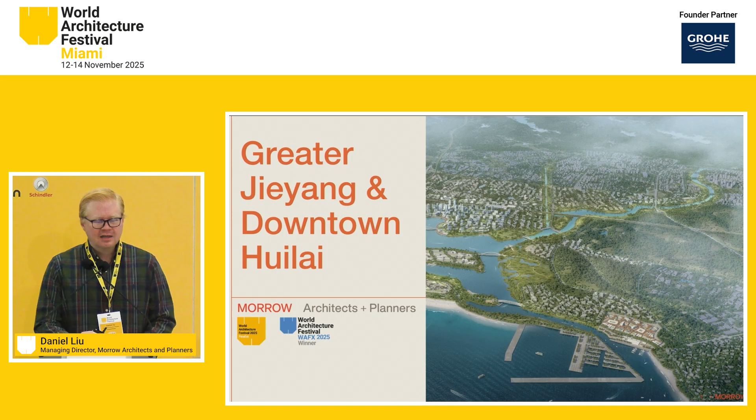Since this session is about smart cities, we wanted to spend a bit of time to share within our own firm how we look at cities, how we define cities, and how that applies to better city development.

For us at Morrow, the foundation for how we define a city generally starts with the population. Today here we are in South Beach, or Miami Beach, which is a city of only 80,000 people. So legislatively, it has all the rights of a city. But from a planning perspective, it doesn't make sense to have such a big auditorium or such a big convention center that could fit 15,000 people in a city of only 80,000 people.

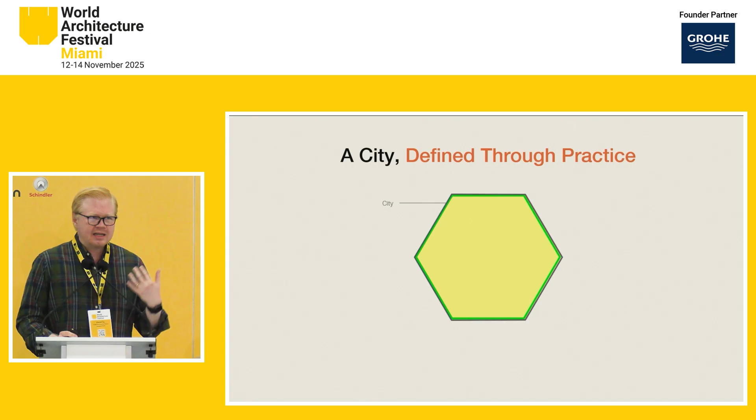So definitely from a planning perspective, there is some kind of understanding of the relationship between this city and Miami and all of that. This hexagonal model that is popping up on your screen now, this is the North Star within our own firm of how we anchor city development. And we start with a population.

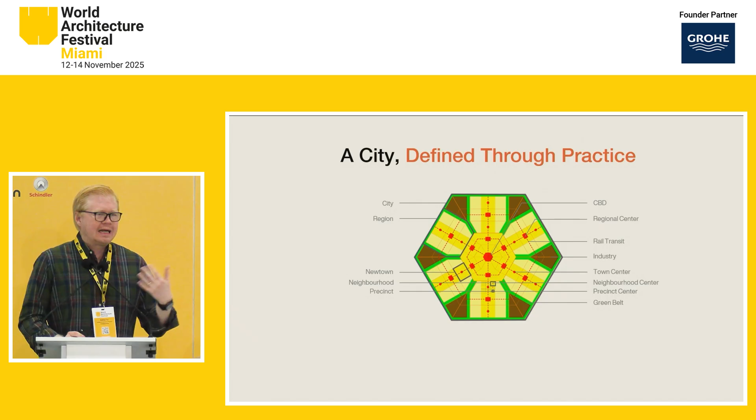For us, cities generally have a population of between 2 to 5 million people. Within that, we anchor the land use and the different amenities that are required to enhance livability, to enhance economic progress, et cetera.

But beyond that, I think what's really important is that within that model itself, there is a very structured hierarchy of different, what we call urban cells. And within each urban cell, there are different strategies for implementation.

For example, in a smaller area that's maybe just a planned population of 50 to 100,000 people, the strategy that we would implement there would have to be fit for purpose, but also the hierarchy of that city or region in relation to the rest of the urban area would be really important to maintain.

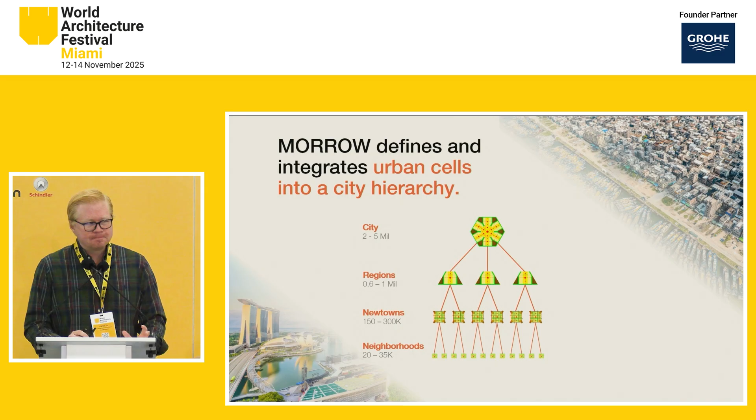Now, when cities are bigger than 5 million people, we have an approach for that as well, and we refer to that as constellation cities. This approach allows us to maintain that hierarchy of different nodes or different urban cells within a city that can also be applied at a much larger scale.

This project that we did in Jieyang actually has 4 sub-cities. And Jieyang itself is quite huge, about 5,000 square kilometers. So it's, for us, a constellation city.

Now, just to give some background, at Morrow we're only about 8 years old, and we've done master planning in about 20 cities and have implemented this approach in all of them. But our founder and the founding team have actually been distilling and updating this urban planning approach over the last 30 to 40 years.

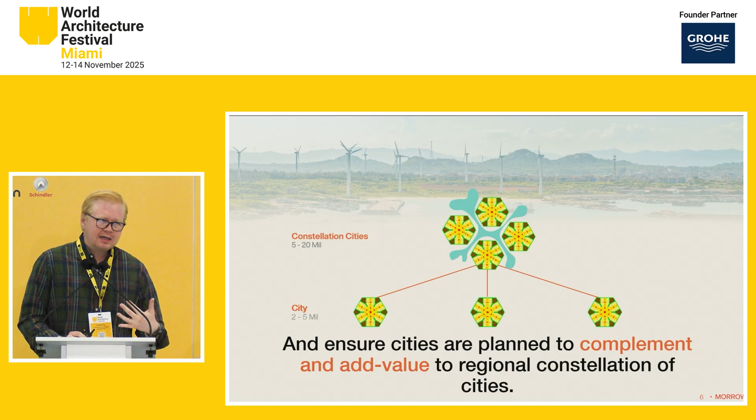And it's foundationally based on Singapore's urban development approach. If that's something we can maybe talk about later on, about how we have used a lot of the success factors from Singapore's urban development story and applied it to many, many cities around the world.

So maybe we'll quickly dive into Jieyang. Like I said, it's a huge project, 5,000 square kilometers, and we were asked to do 3 different scales. So at the first scale, we did a strategic master plan for the whole site, 5,000 square kilometers.

Then within that, the client, which is the government, wanted us to look at developing an urban center towards the south, along the south coast. That is Huilai. And then a third scale that we worked on is downtown Huilai, and later Kenan will show some renderings and strategies for that as well.

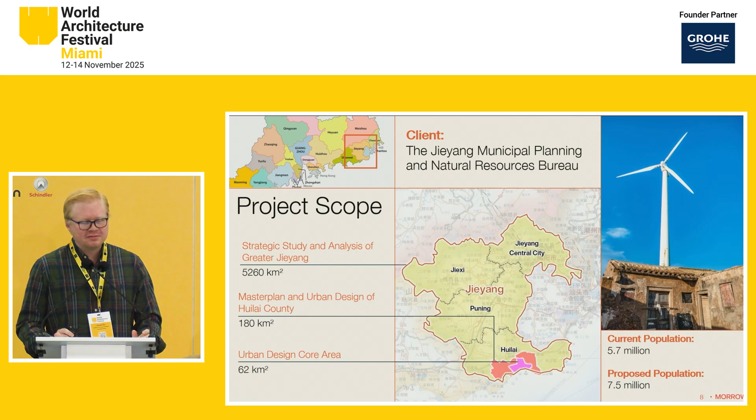But even before we apply our own methodology, and we refer to that as intelligent planning—maybe we need a rebrand around that—before we even start to think about how we apply intelligent planning, we do a very large-scale contextual look at the city's context. So Jieyang lies about 150 kilometers east of the Greater Bay Area in China.

For those who don't know, the Greater Bay Area is home to 85 million people and some of the most industrially advanced cities in the world. So Shenzhen, Guangzhou, where most of the stuff everyone is wearing today is made, is in this area. And it's one of the richest parts of Asia.

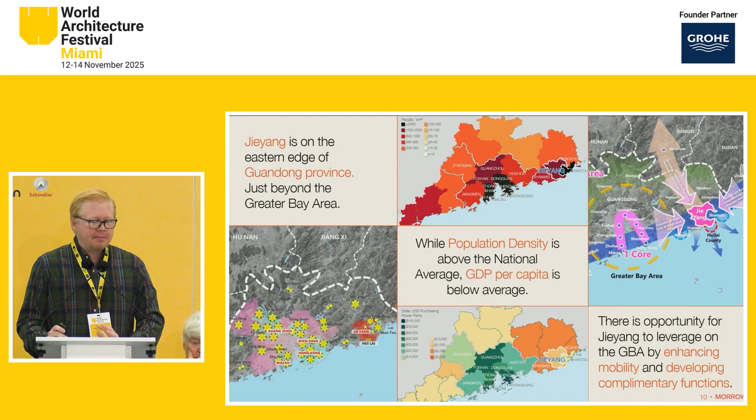But 150 kilometers east is Jieyang, and actually, even though the population density is quite high, the GDP per capita is much lower. So when we were doing that positioning, we felt from the start that for this city to actually work and for our master plan to make sense, the positioning has to be that Jieyang needs to be an engine for economic growth in eastern Guangdong, to rely on the fact that it's so close to the Greater Bay Area, and sits along a future transport corridor between the southeast and southwest of China.

So once we had that positioning, we went back to our intelligent planning approach and looked at the 3 different scales that we were asked to do and applied strategic pathways or strategies for each scale. And to walk you through those in more detail, here's Kanan.

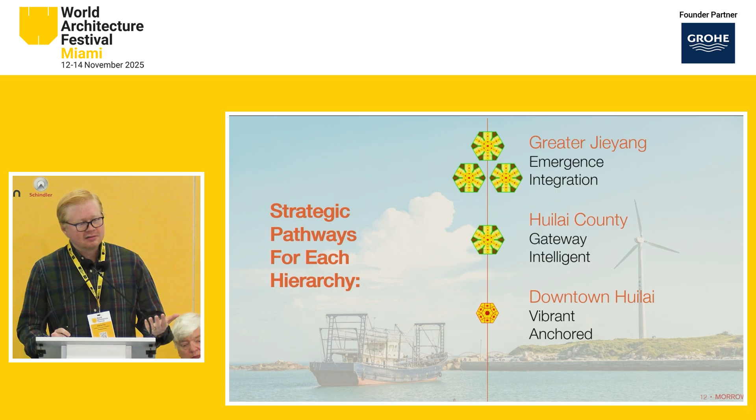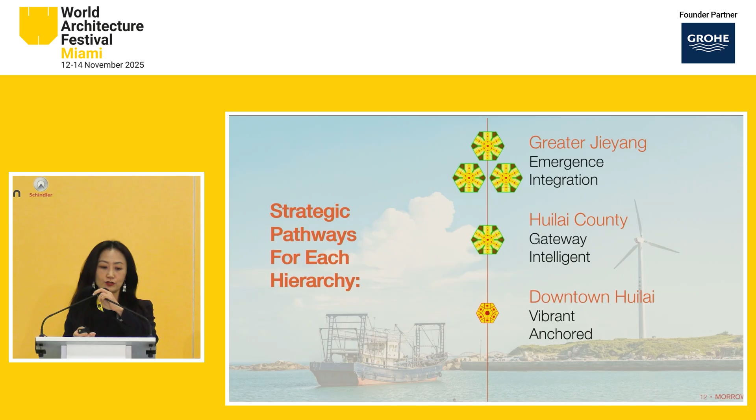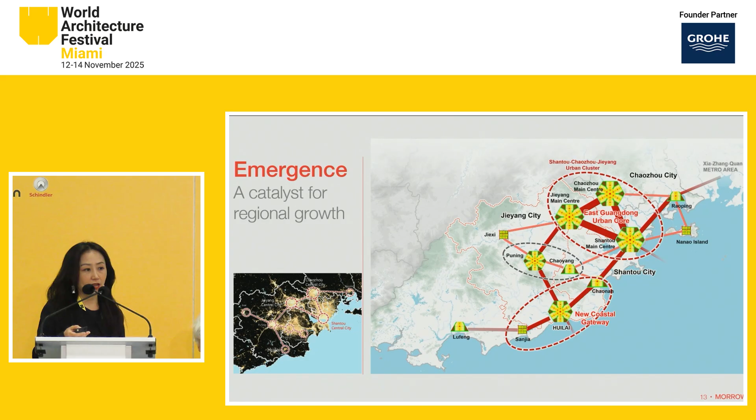Thank you, Daniel. Let me go through the 6 strategies over the 3 scales. First, on the screen, you can see this is the constellation scale, and we are not only covering Jieyang city itself. It includes 3 interconnected cities, and we identify every single city's growth potential and its urban linkages. In addition, we try to reserve the large green corridors to prevent urban sprawl.

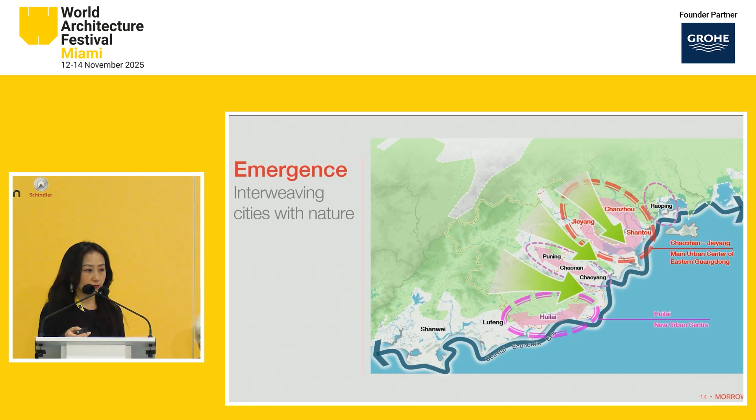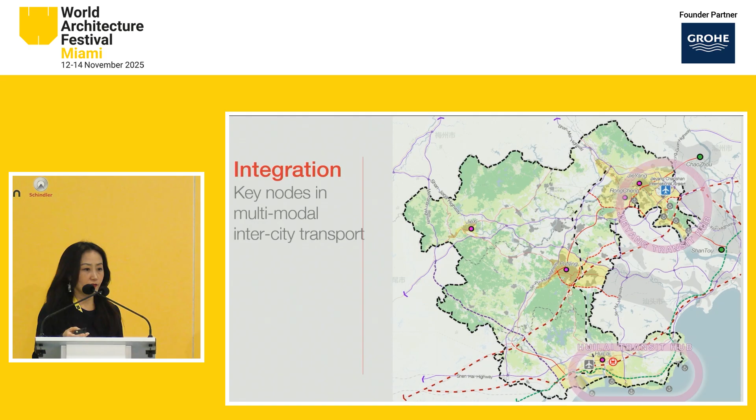And the second strategy is integration. We propose comprehensive road networks. On one hand, we enhance the intercity mobility, but on the other hand, we try to minimize the impact to nature.

And from this drawing, you can see the black color and the gray color are urban zones, and nature and mountain areas take the lead of the whole environment. So we aim to create a shared home for human life and biodiversity. As a planner, it is very important to take the responsibility to manage not just the human beings' needs, but also to balance nature and human life—very important in today's topic of smart cities.

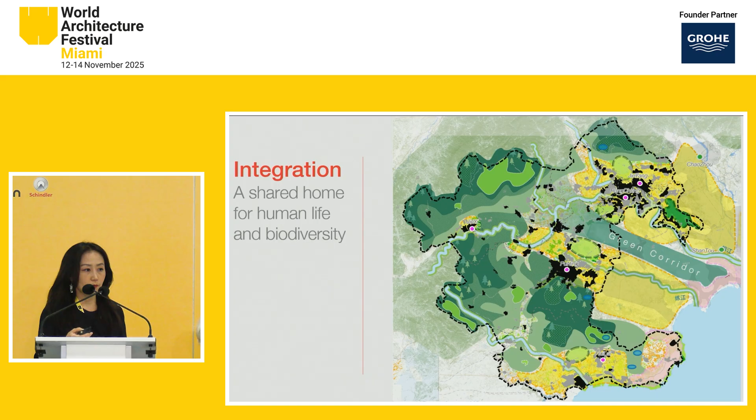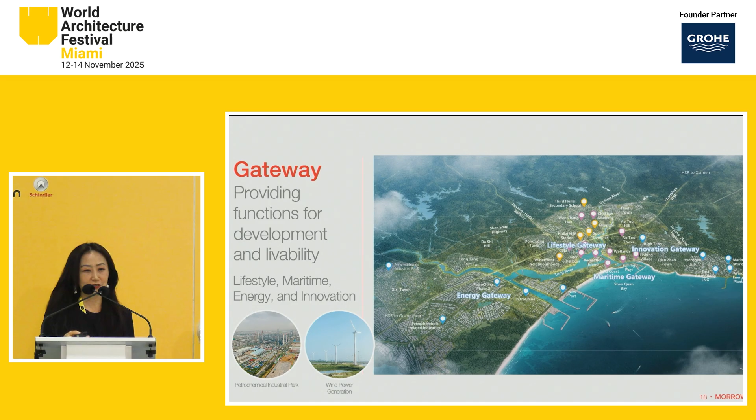And then if you zoom into the south on the screen, you can see this is Huilai's 2 million people population size. And I will quickly guide you how the intelligent planning works.

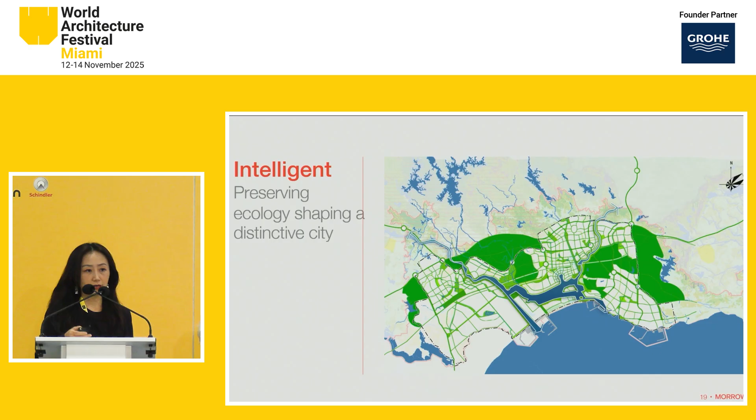When we do the intelligent planning, the first step is we create this kind of blue and green corridor, where we don't allow any new development to take place. Secondly, we build the connectivity. Thirdly, we put the urban cells and urban functions into it. It is quite a complex situation, and I won't go into details here.

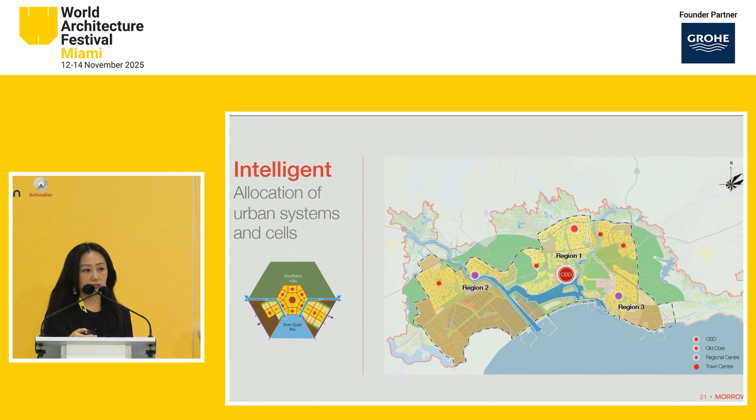And you can see from the left corner, there is the city model. It is derived from our standard city models, but we customized it into the local context. And we put everything together, and we call it the integrated system of systems.

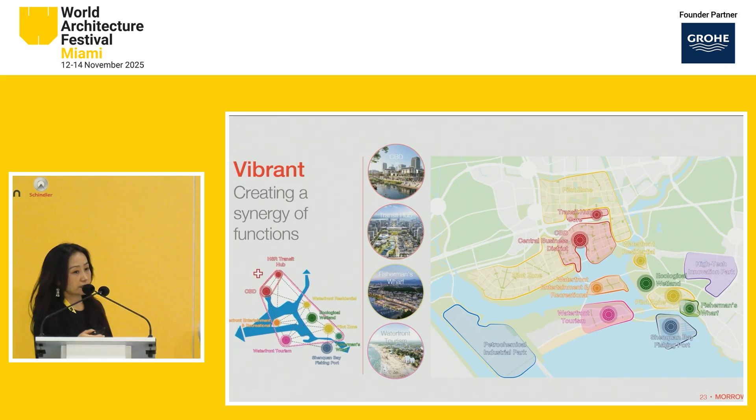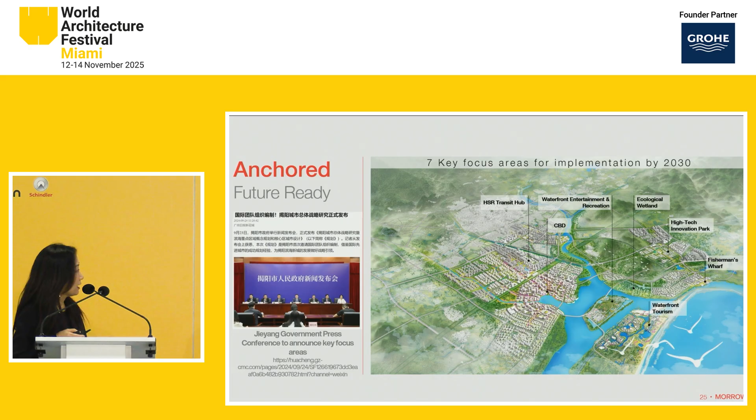And this is the third scale, downtown Huilai. We honored tradition while embracing modernity in our urban design. And lastly, I will quickly go through the 7 key focus areas for implementation by 2030.

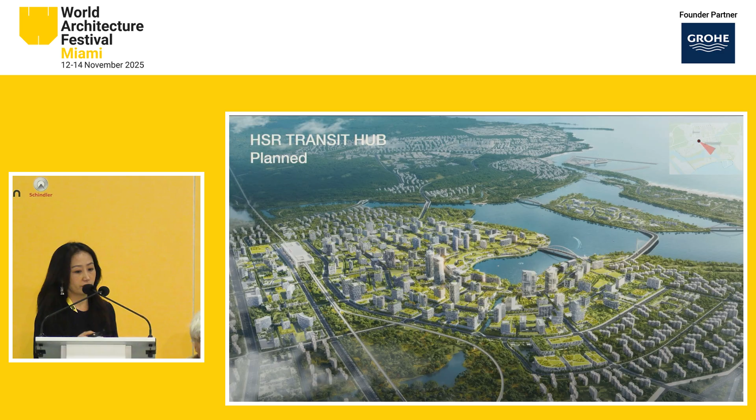This is the first area: the high-speed rail transportation hub. That is the current situation, and this is how we envision it in the future. And this is from the other angle—the CBD area. They have a lot of rich water, and we reshaped it into an inner sea harbor.

And this is the coastal area. We try to, based on the existing situation, find the inner beauty of nature. This is similarly an ecological wetland area. We don't dominate the design; we follow what nature asks us to do.

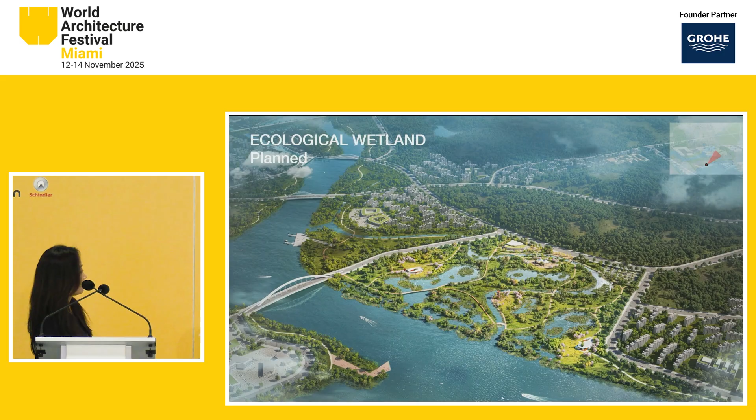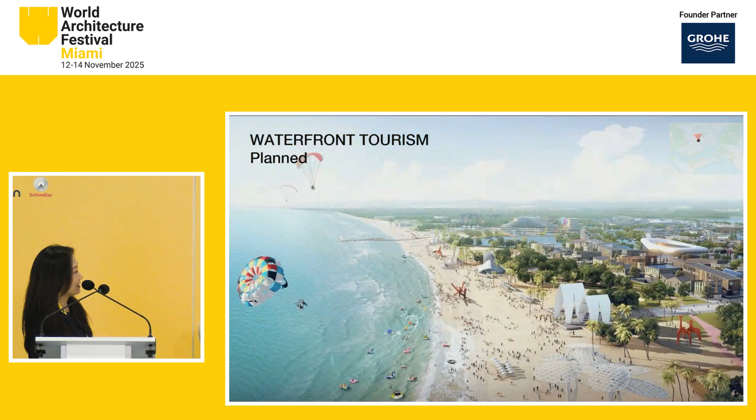This is Innovation Park. We try to build a focused and calm environment for creativity and innovation. They have a very beautiful natural beach, but no activity. We try to introduce a range of programs and public activities here.

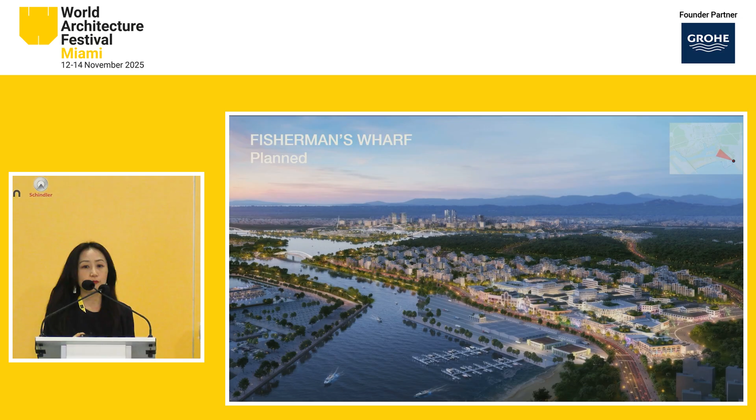This is building on the existing fish market. We form a comprehensive fisherman's wharf to both promote city life and tourist opportunity. I just quickly go through this. Thank you.